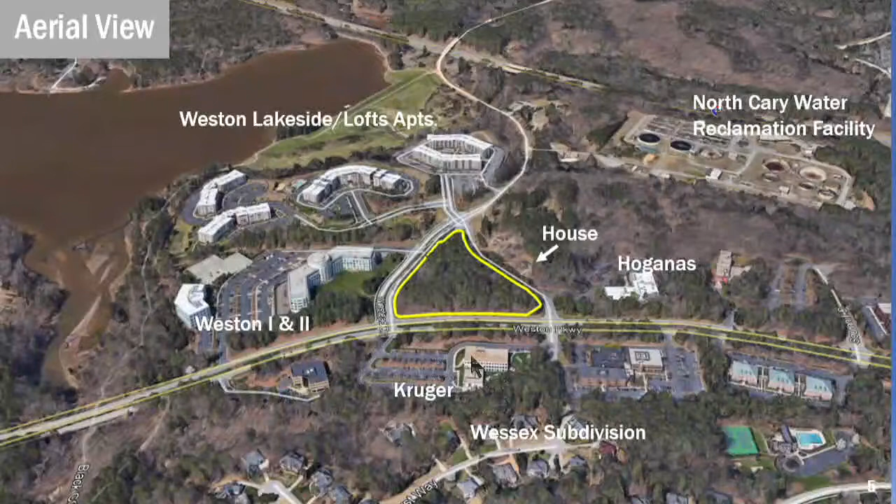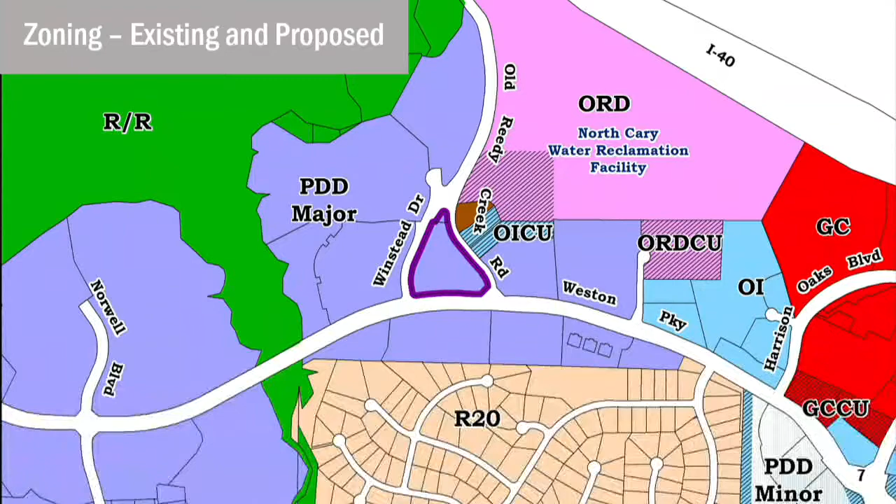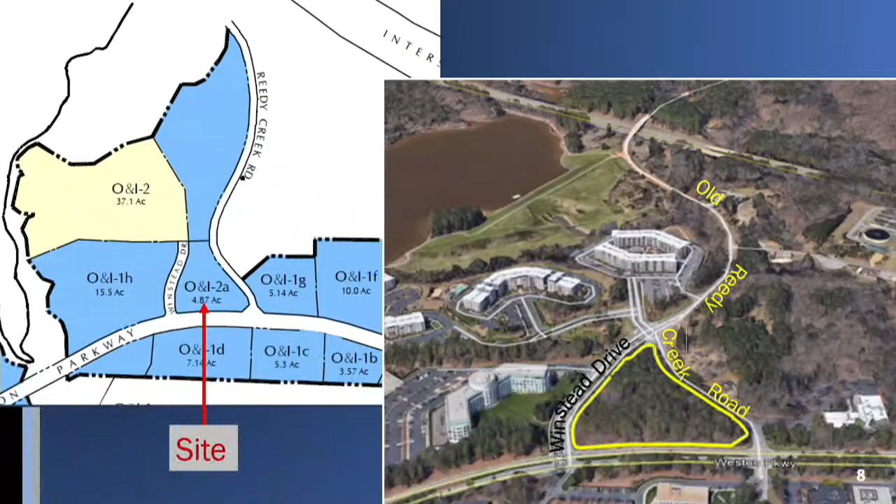On the left you see the zoomed-in view. The master plan was amended with a rezoning in 2004 to allow the development of Weston Lakeside Apartments, located just to the northwest of the subject site. Then another rezoning in 2010 allowed development of the Lofts at Weston Lakeside, north of the subject site. When the Lofts at Weston Lakeside were built, Winstead Drive was connected to Old Reedy Creek,

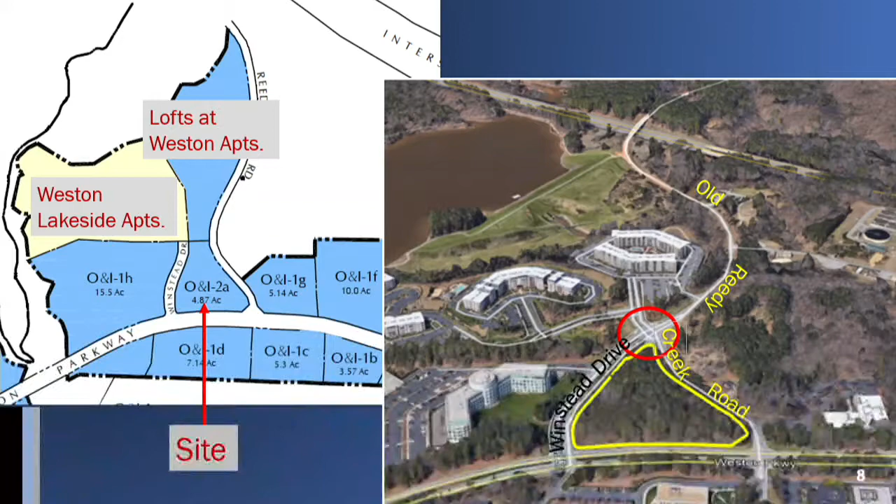creating the 4.87 acre triangle of land that is the subject site. So you can see how earlier Winstead Drive was not connected to Reedy Creek.

The proposed revisions to the PDD, and these are for the hotel use only, are to reduce the 50-foot streetscape buffer along Old Reedy Creek Road to 30 feet, supplement the required streetscape plantings along Weston Parkway to achieve a Type A buffer standard, increase the maximum building height from 50 to 90 feet, which is approximately 7 stories, reduce the parking rate by 19%, and provide sidewalks along all 3 street frontages.

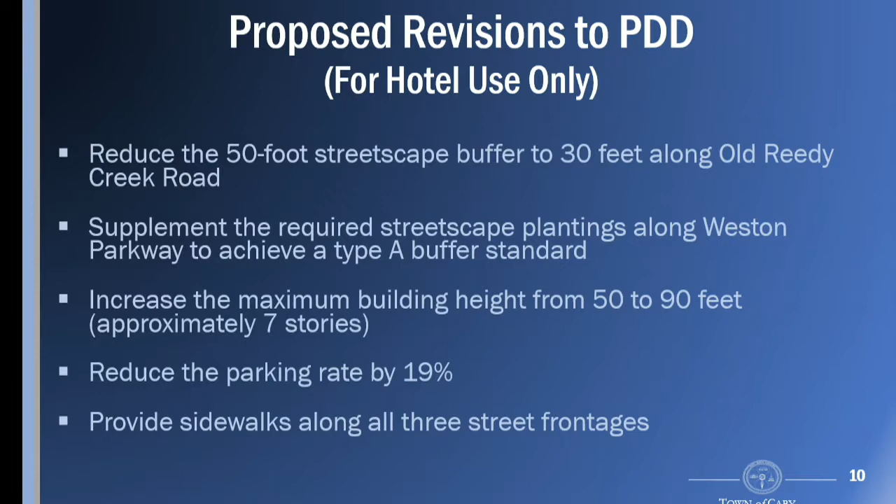Additionally, for the hotel use, if the hotel use were to be realized, the applicant would provide hardscape features to beautify and screen the service entry, and I'll show you that on a map in a minute. They would provide signalized pedestrian crossings, construct a right turn lane on Weston Parkway onto Winstead Drive, provide an at-grade pedestrian path from the parking structure to the main hotel entrance, and incorporate a terrace on an upper floor of the hotel that can accommodate full-service food operations.

And here's the depiction of the proposed master plan. In the blue on the right is the building envelope for the hotel. The peach color on the left is the parking envelope where there would be a 2 or 3 story structure, a parking deck right here in this area.

The main access to the site would be off of Winstead Drive, and these arrows depict that site access. They're not exactly in the place where they might be, but it's going to be on this side. The service entry to the site would be off of Old Reedy Creek Road, here, service access here, and service access here. The applicant is proposing to do those hardscape features, a 6-foot screening wall and some decorative paving on the apron leading in and around there on the parking.

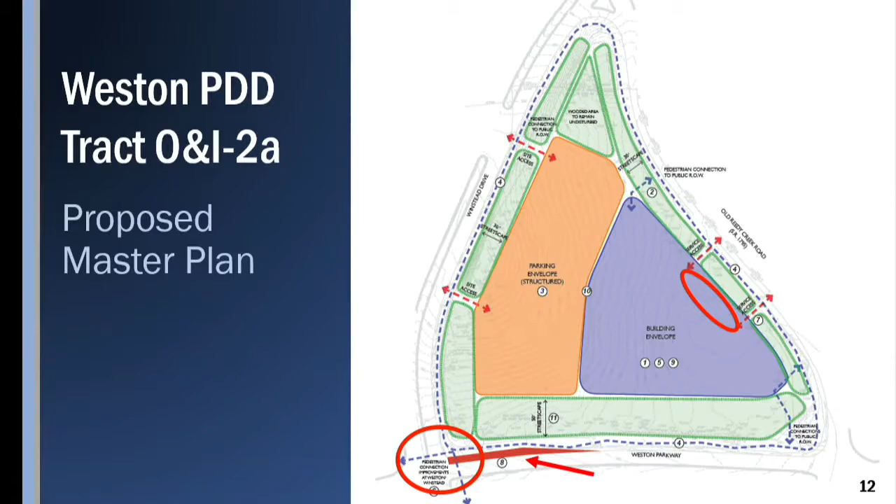Also, the signalized pedestrian crossings: one would be in this area across Winstead, and the other would be across Weston. And finally, that red streak represents the widened turn lane and vehicular storage that they are proposing.

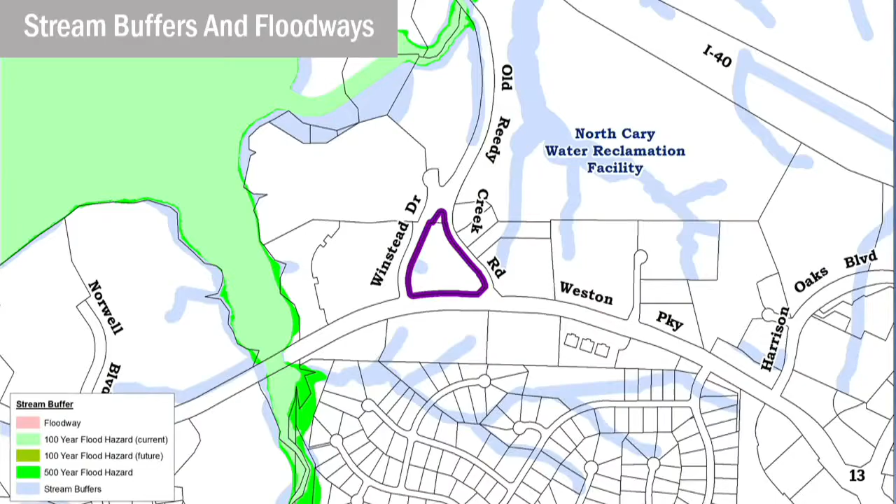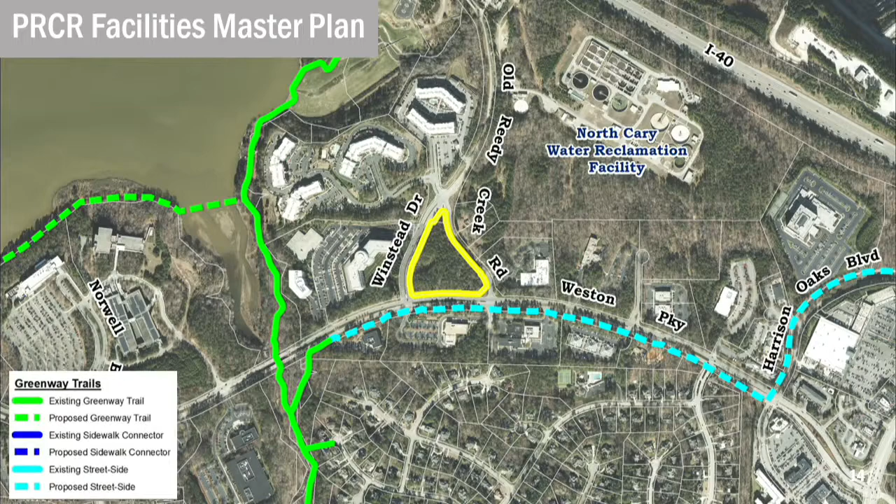Cary's GIS maps indicate a stream buffer may slightly impact the property. There are no proposed or existing greenways or street-side trails within or directly adjacent to the subject site. However, a street-side trail is proposed for the south side of Weston Parkway, and the applicant's offer to install signalized pedestrian crossings across Winstead and Weston Parkway would improve safety for pedestrians who want to cross over that intersection to get to the street-side trail.

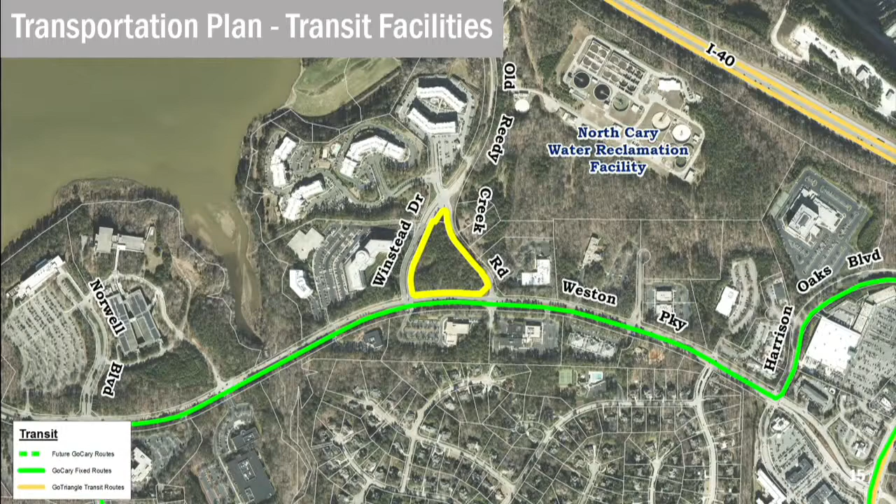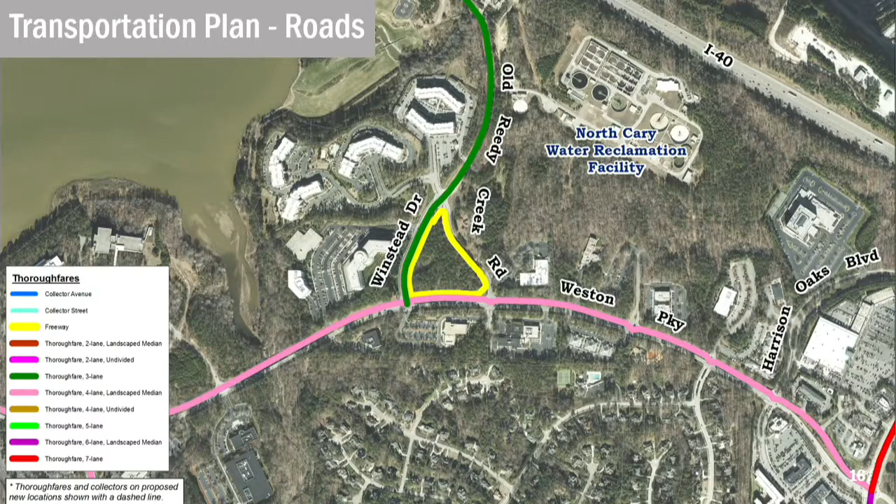On the transportation plan, Winstead Drive is a designated thoroughfare, Weston Parkway is a 4-lane thoroughfare with landscape median, and Old Reedy Creek Road is just a local road.

Before the Town Council public hearing on June 28th, 7 citizens attended the neighborhood meeting on March 7th. Concerns were expressed about the height and visibility of the proposed hotel. Questions were asked about setbacks, proposed parking, sidewalks, and the traffic analysis. Staff also responded to an information request by the Weston Property Owners Association, and a caller from Wessex Subdivision expressed concern via email about traffic, safety, and overdevelopment.

At the Town Council public hearing on June 28th, 9 citizens offered comments. 6 citizens expressed concerns about traffic making it difficult to safely turn in and out of the Wessex subdivision, the proposed 100-foot maximum building height, the proposed buffer reduction along Weston Parkway, and some Wessex residents expressed concern that hotel guests would be able to see into their backyards. Other speakers said they didn't see the need for another hotel in the area, and 3 speakers spoke in favor, saying there is a need for more affordable, nice hotels in Cary.

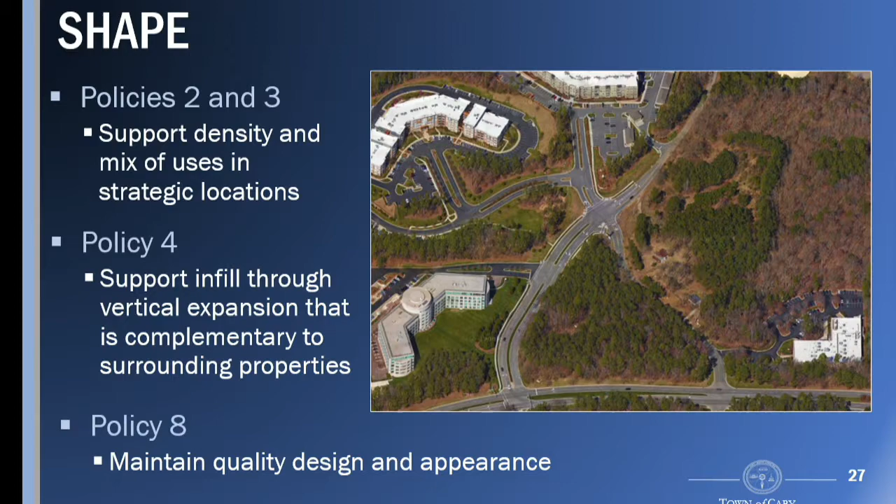Move policies 1 and 2 reinforce the importance of safety and accessibility for all users and modes of travel, and policies 3 and 8 reinforce the importance of an attractive, well-maintained system that complements the land use context. The applicant is offering to provide sidewalks, supplemental plantings along the 50-foot streetscape, and to construct the right turn lane and provide signalized pedestrian crossings. These should add to pedestrian safety and accessibility.

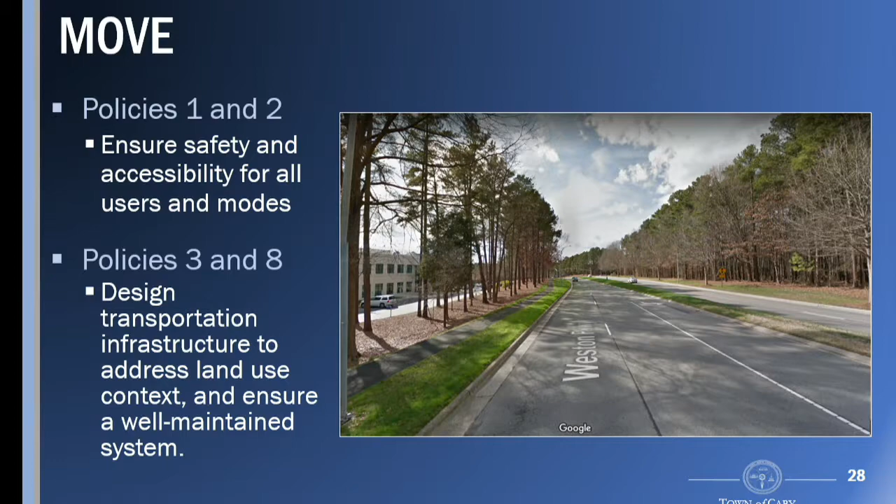In summary, staff's analysis is that the applicant's proposal would continue the Weston PDD's transition that began in 2004 to a more mixed-use environment, and as a commercial use has the potential to advance the employment mixed-use campus vision. On the other hand, a hotel use would remove 5 acres of office-designated land from a dwindling inventory in the Weston PDD, and the proposed plan for a 7-story building with adjacent structured parking on 5 acres would introduce a new level of development intensity to the eastern end of the Weston Parkway corridor.

After weighing all considerations, of which there are many in this case, staff finds on balance that the applicant's proposal is generally consistent with the Imagine Cary community plan. And I believe the applicant is here to make some comments.

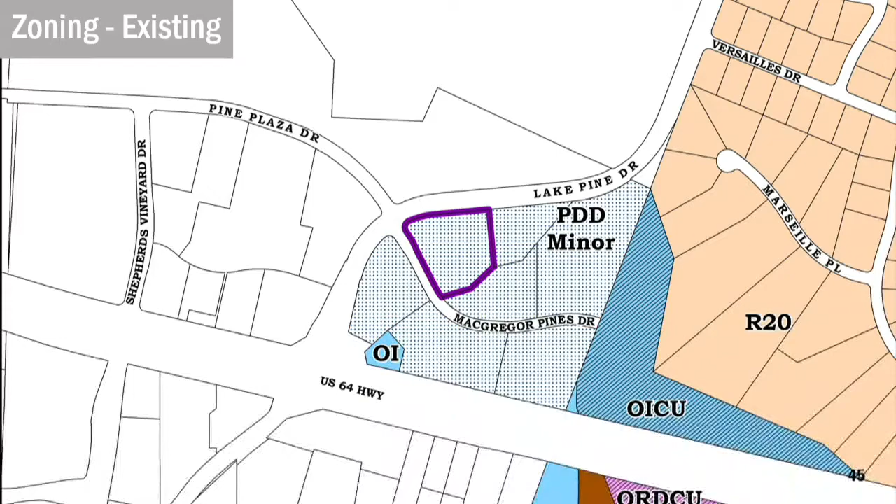The subject site is zoned PDD Minor, MacGregor Centre. The applicant is not proposing to change the PDD designation. However, the applicant is proposing to increase the number of allowed personal service establishments from 1 to 2 and to add commercial indoor recreational facility as a permitted use. Now, what is a personal service establishment, you might ask? That would be a business that provides individual services to customers located on the site of the business, and would include such uses as travel agencies, dry cleaners, tailors, repair shops, and one-on-one fitness instruction facilities, for example, a personal trainer.

It would not include indoor-outdoor recreation uses, which is where uses such as taekwondo studios, karate schools, or dance schools fall into that category. These kinds of uses address large groups of people and therefore are distinct from personal service establishments.

So this amendment would bring those former uses back into compliance. In our preliminary analysis of this request, we found that this amendment would bring that use into compliance and would expand opportunities for further businesses on the property. It would help the McGregor Shopping Center continue to thrive. The subject site, as you can see here, is located within the commercial center designation on the future growth framework map.

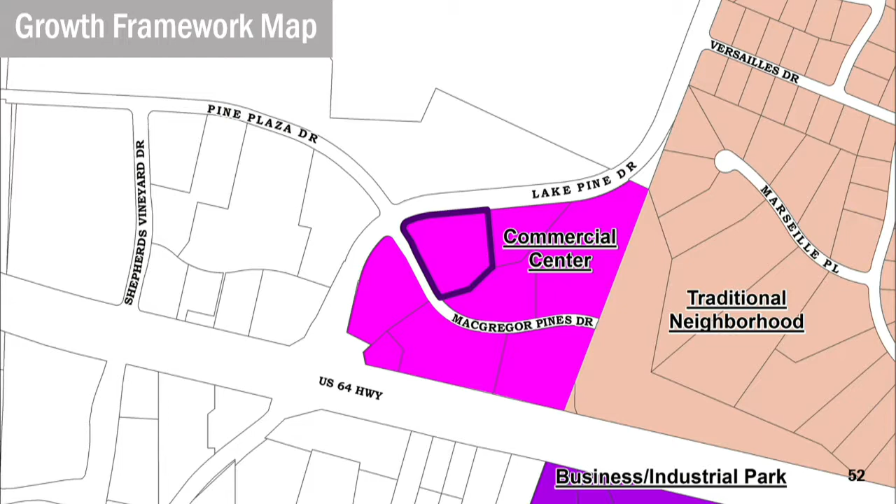At the neighborhood meeting, no property owners attended and no citizens expressed concerns to staff through phone calls or emails. During the Town Council public hearing on October 25th, no citizens spoke during the public hearing. There were no questions or comments from council, and there have been no changes in the application since the hearing.

Staff finds that the rezoning is consistent with the Imagine Cary Community Plan. The proposal supports policies from the Work and Shop chapter of the Cary Community Plan. The proposed commercial use is consistent with the Future Growth Framework Map as a commercial center, and the proposed use is reasonable given the commercial center location. This concludes staff's presentation. Staff, as well as the owner of the property, is available to answer any questions. Thank you.

Good evening, I'm basically here to answer any questions, really. I think Dylan did a fabulous job, so yeah. Well, thank you. Absolutely, if we have any questions, we'll be happy to bring them to you. Anyone on this side?

I had a point of clarification. So this use was, if I understood correctly, correct me if I'm wrong, an approved pre-existing use that was allowed, but somehow it changed? That's correct, yes. The LDO and the PDD had changed over the years, and now the use is no longer conforming, so this PDD amendment would make it conforming.

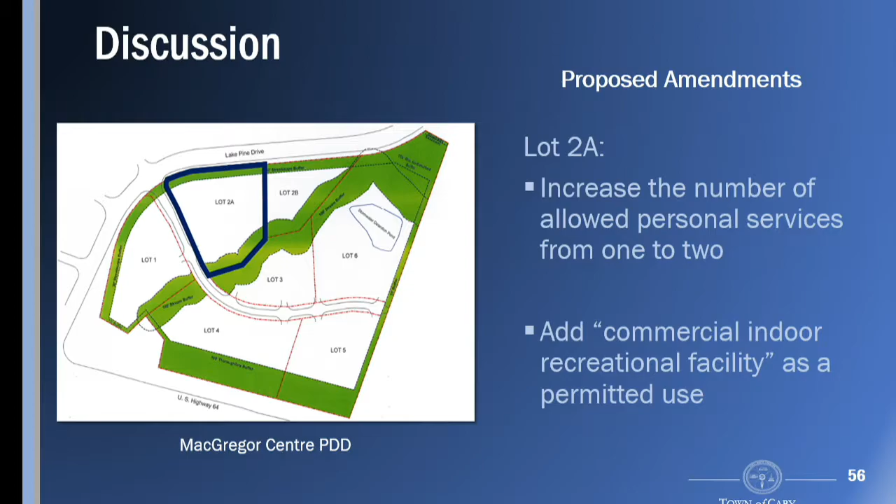No one else? Nothing for our applicant? I'm almost disappointed for you that no one has questions. Okay, well then, would there be a motion?

I'll make a motion. I move that the board find case number 18 REZ 20 is consistent with the comprehensive plan and all other applicable plans for the reasons set forth in the staff report, presentation, and discussion by the Planning and Zoning Board. Have we a second? I will second that motion.

Any further discussion? It was a use that was allowed before, and on a personal note, I remember when that whole development was trees, going back about 20 years ago. I remember before even the shopping center was across the street, and anything that helps the viability and future development of that would be welcome, I think. That's just my personal note. Keeping tenants in the building so it stays as is—I've seen every tenant in there turn over at least once, so keep that up.

Anything else? No. Would all those in favor please say aye? Aye. Any opposed, say no. That is a unanimously carried motion as well.

We'll find something to ask you before the night's out. Thank you, Board.

Our third and final case for the evening is 18 REZ 21, Good Hope Church Road. Katie Dry is here to speak with us. Ms. Dry, good evening. Good evening, Board.

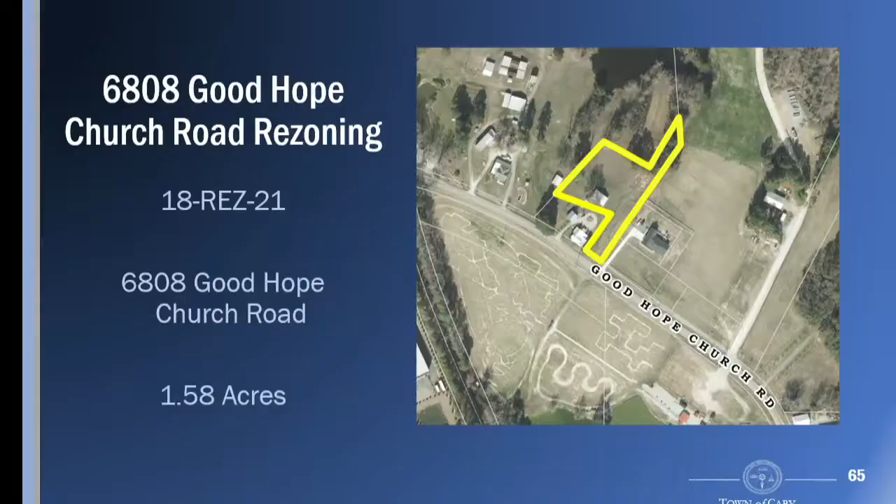This is a request to rezone 1.58 acres at 6808 Good Hope Church Road. The site is located on the north side of Good Hope Church Road, just east of Highway 55, and the CSX railroad line. The entire parcel is 2.15 acres, and the applicant is requesting to rezone 1.58 acres, a portion of that, to allow development of one detached dwelling. The property contains an existing historic house, the Hearst House, built around 1930, located at the front of the property adjacent to Good Hope Church Road. The Hearst House is not associated with this rezoning because the applicants are proposing to rezone the rear portion of the parcel to residential 40 conditional use, again to allow for development of one detached dwelling.

The current zoning is office research and development. Properties to the west and south are also zoned office research and development, and have been zoned as such for at least 25 years, prior to the adoption of the town's 1996 land use plan and any special area plans for the historic Carpenter area. The applicants are requesting to rezone the northern portion of this parcel to R40 conditional use. They have indicated they intend to leave the front portion of the lot as ORD to preserve the historic Hearst House in its current location and upfit it for use as a professional office. There are no conditions regarding preservation of the house, however, because it's not part of this rezoning.

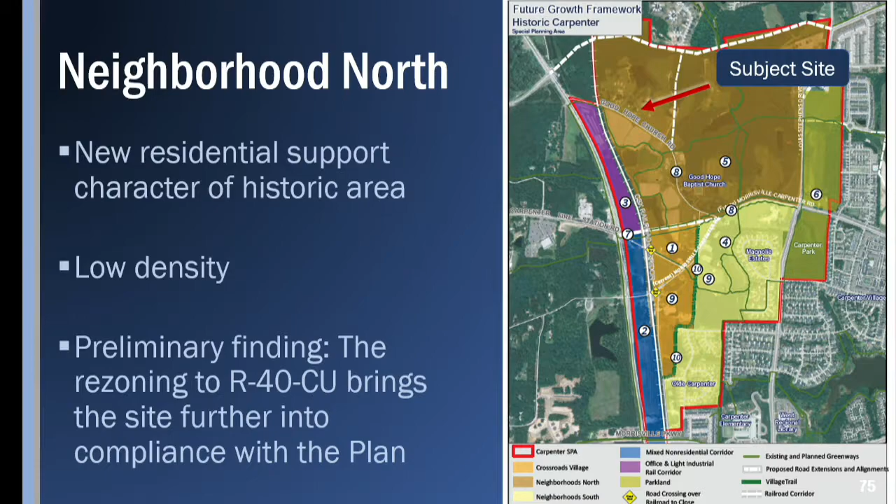Staff has evaluated the rezoning using the Imagine Cary Community Plan. The site is within the historic Carpenter Special Planning Area, and the rezoning will help preserve the Hearst House by keeping it in its immediate historic context. Looking at the future growth framework map, the development category is mixed neighborhood, describing neighborhoods in northwestern Cary. The site is also within the historic Carpenter Special Planning Area, one of 5 special planning areas in Cary. Guidance for this section, designated as the brown area numbered 5 on this map, indicates that new residential development should support the character of the historic area and should be low density. Staff finds that the rezoning to R40 conditional use will further bring the site into compliance with the plan.

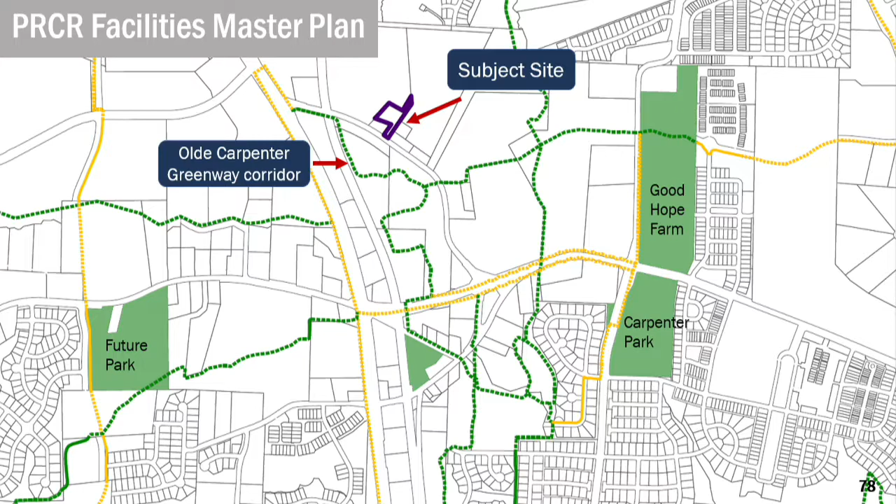Looking at the town's GIS maps, there may be a stream buffer to the north of the site. Looking at the Parks, Recreation, and Cultural Facilities Master Plan, there are no existing or proposed greenway corridors next to the site. The proposed Olde Carpenter Greenway corridor is shown south of the subject property, and there are existing and proposed parks about 1 mile to the east and west.

Good Hope Church Road is a local road, and it will remain a local road according to the transportation plan. The Carpenter Fire Station Road Realignment and Railroad Grade Separation Project is to the south of the property. Upon completion of that project, the bridge over CSX Railroad will be closed to vehicular traffic. However, the bridge is currently being evaluated by the town and NCDOT to assess feasibility for bike and pedestrian use.

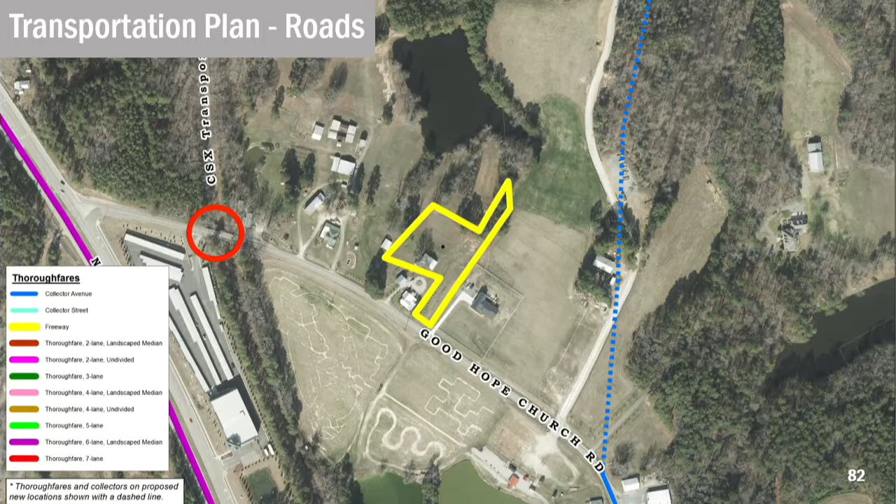For both the public hearing for the town council as well as the neighborhood meeting, properties within 800 feet of the site were notified. At the public hearing on October 25th, there were no citizens who spoke. In general, council had positive feedback for the request.

Staff finds rezoning to be consistent with the Imagine Cary community plan. Staff finds that the proposal supports policies from the historic Carpenter Special Planning Area, and the proposed zoning will serve as an appropriate transition between the Hearst House and surrounding properties.

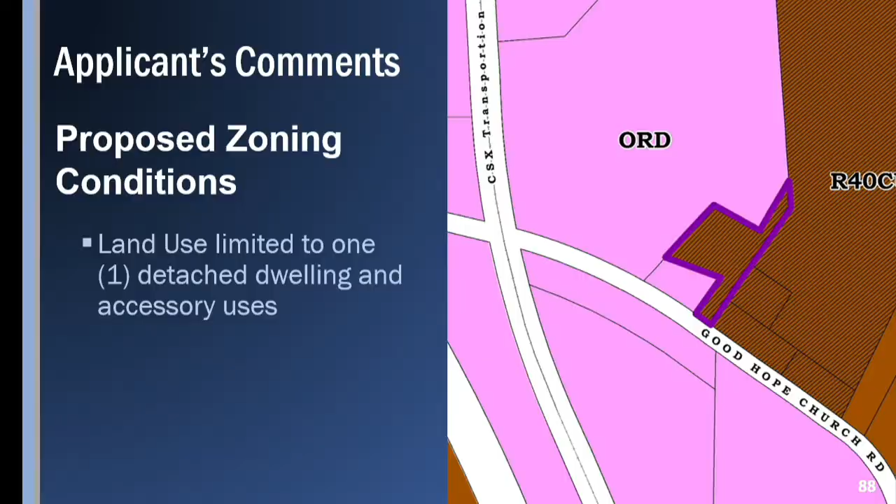The applicant is here to share comments. Following that, staff is available for questions. Thank you.

Good evening, we are Michelle Humphreys and Chris Humphreys. We don't have anything technical to add. Katie has been doing a fantastic job throughout this process, but we're just here to let you know how excited we are to be this far along. When they first told us how long it took, we were like, oh my goodness. So we're really excited to be here, and we're happy to answer any questions you may have.

Well, thank you, you can hang out right there if you like. Does anyone have any questions for the staff or for the applicant? We'll start on this side again. None? There, Joe? No? Moving right along, are they just wanting to build a house? Pretty much, yes. Okay, just wanting to build a house, that's what I thought I'm hearing here. Good for you. That's it, I don't have any questions. I'm good.

Well, if there's no questions, how about a motion? I'll make a motion. I'm trying to figure out which one we're on. REZ what, 21? Is it 18 REZ 21? REZ 21. All right, I move that the board find case number 18 REZ 21 is consistent with the comprehensive plan and all other applicable plans for the reasons set forth in the staff report, presentation, and discussion by the Planning and Zoning Board. Do we have an equally enthusiastic second? I'll second. We'll second it together. We'll second the second, considering the motion, two seconds together would probably be equal.